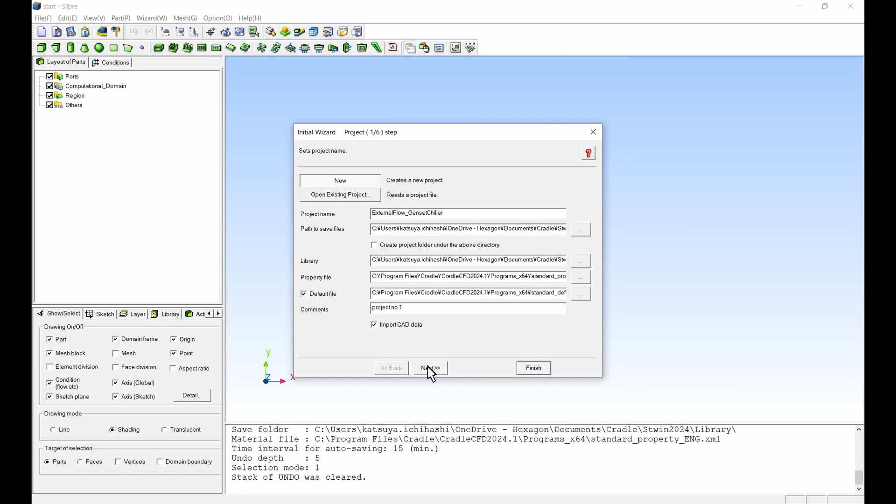On this screen, select Read from File to select the CAD from the Explorer and import it into your model. The next step would be to introduce the X, Y, and Z coordinates to place it, and finally the conversion to scale it. When you are happy with the configuration, click Configure.

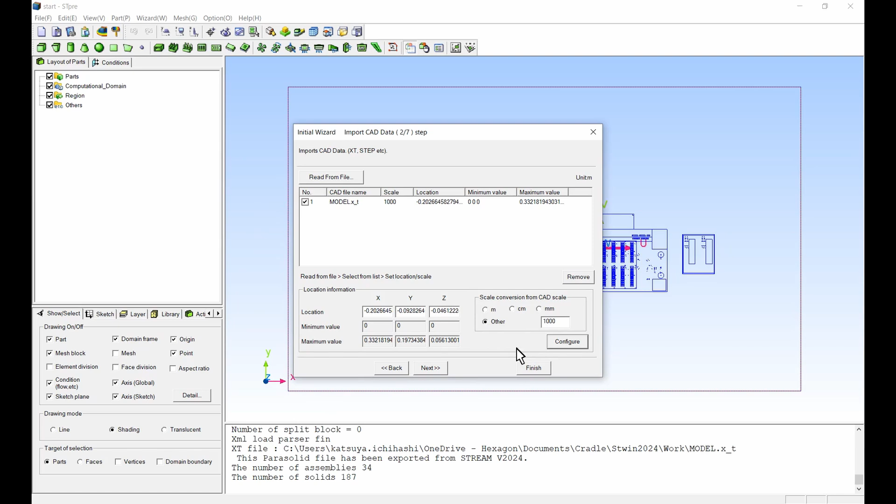On this screen, you can set the coordinate system, the units, and the computational domain. Be aware that if the computational domain is larger than 500 meters, it might not be possible to create it. So set the units to kilometers. When you finish this configuration, click Next to go to the next page.

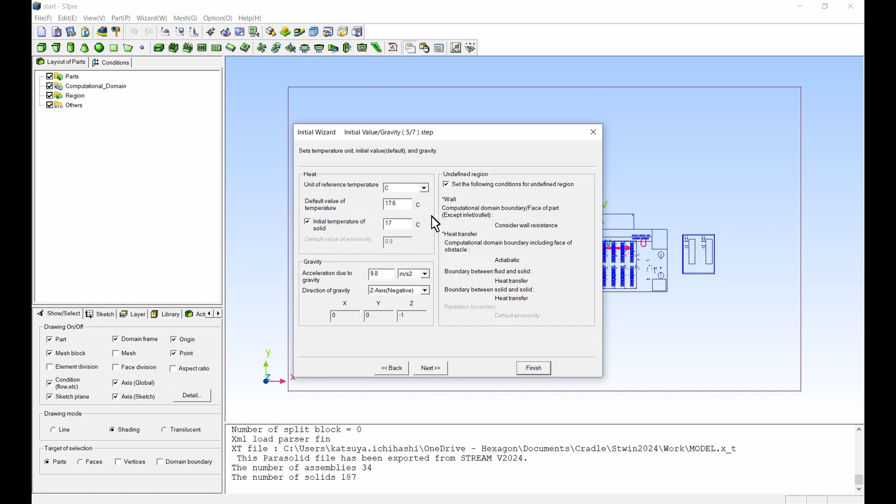No changes are required for the analysis type, so click Next again. Enter the default value of the temperature and initial temperature of solids.

Next, select the basic type of computational domain as external flow, winds blowing through buildings. And in the next screen, enter the wind direction, environment, reference height, ground elevation, and wind speed at reference height.

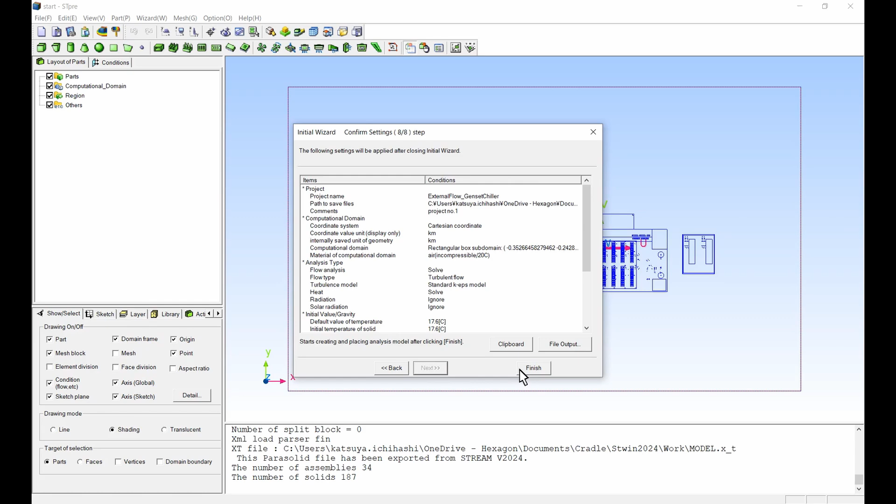When you finish the configuration, click Next and just check that there are no problems in the settings. Click Finish to close the initial wizard.

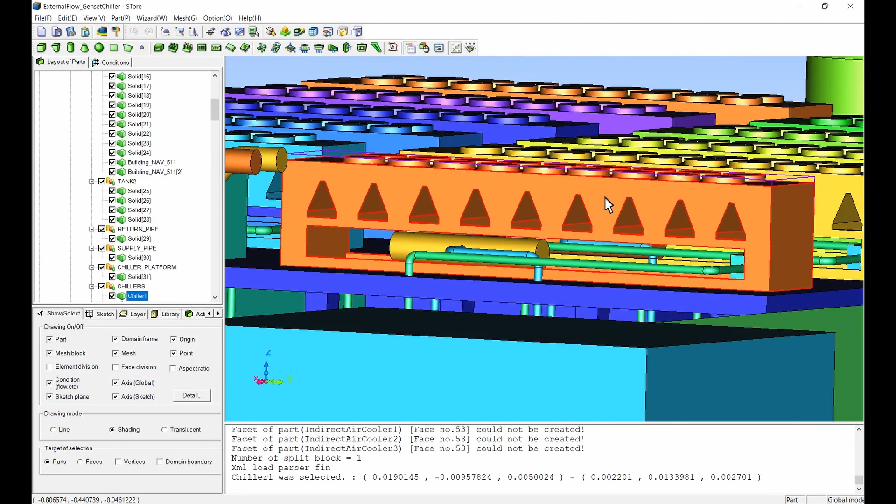Now that we are in the model, the first thing that we are going to do is to set the faces of the chiller parts for the boundary conditions. So we are going to apply the name for the faces that are going to be relevant to set the analysis. First, focus on the chiller 1 and isolate it in the view.

To make the faces easier to see, change the drawing mode to translucent, and then click on Edit Part Face. In this window, enter the part face name and select the part face on the draw window. When you finish selecting all the relevant part faces, click on Register.

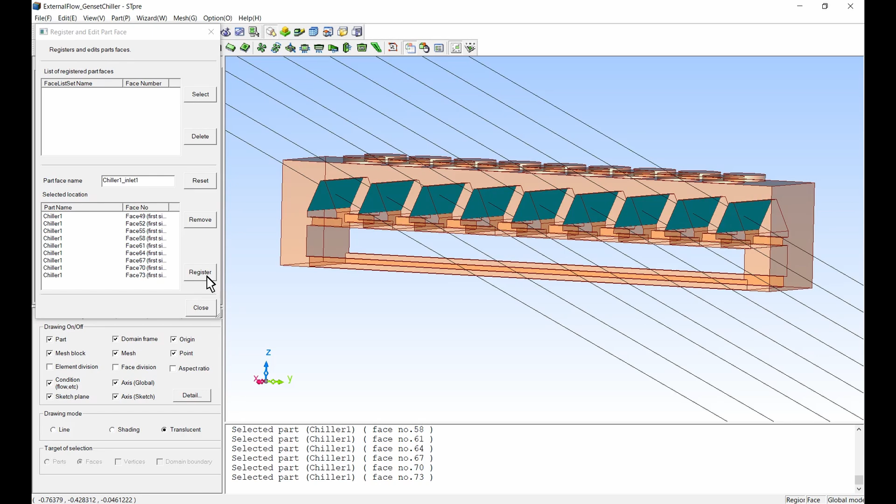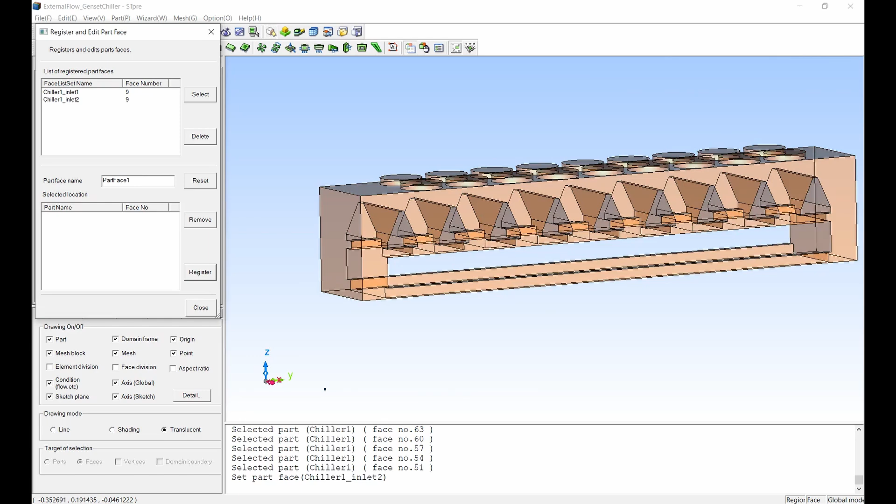We need to follow the same procedure for the part face names for the Chiller 1 Inlet 2 and Chiller 1 Outlet. So select the relevant faces, in this case for the Inlet 2, and register. And finally, repeat the process for the Chiller 1 Outlet to finish this part of the configuration.

We would repeat this process to register the same faces for the other chiller parts.

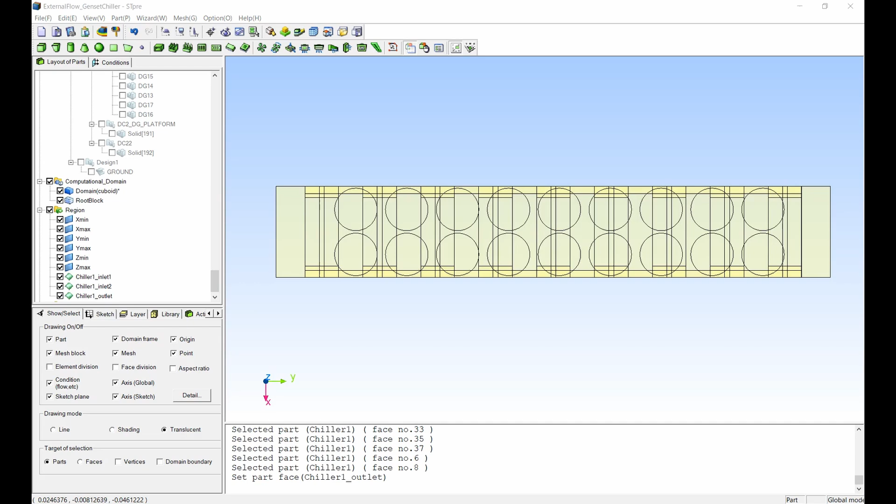Next, we're going to set the faces for the chiller parts for the boundary conditions. First, we need to change the attribute for the Chiller1 Inlet 1 to Condition Region Face.

Then, in Edit Part Face, we're going to enter the part face name Chiller1 Outlet and select the part face on the draw window. We need to repeat this process for the other chiller parts.

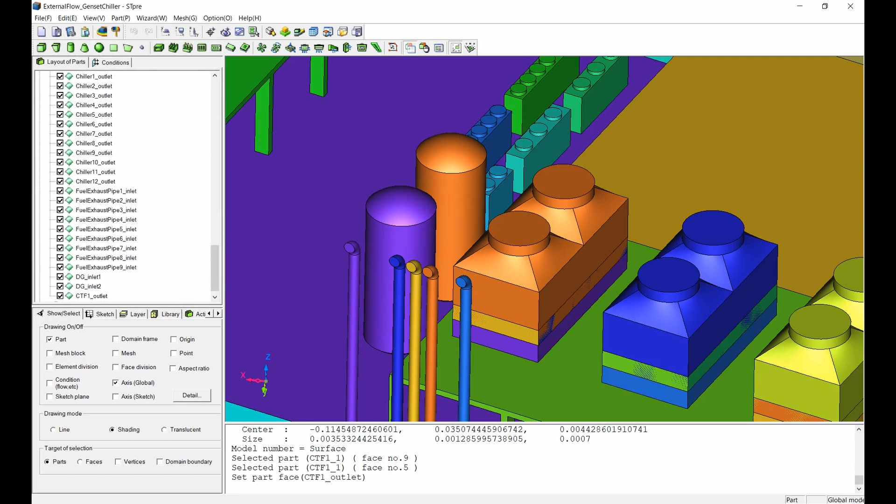Now we are going to set the faces of the IAC parts for the boundary conditions. We can select multiple parts, right-click, and click on Change Part Setting Together. In the attribute part, we can change to Condition Region Face as the attribute and click Set. Repeat this process for the other IAC parts.

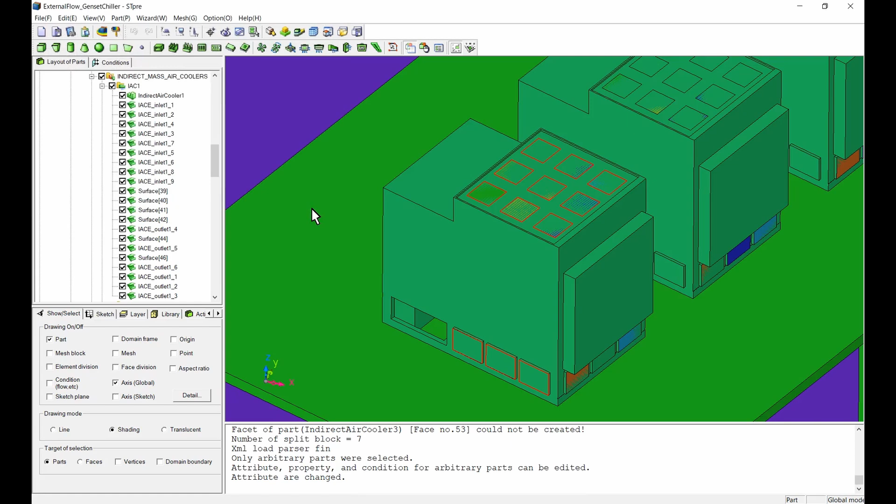Now set the faces for the DG parts for the boundary conditions. First, focus on the DG1, click Edit Part Face, edit the part face name, and then select the part face on the draw window. Finally, click on Register.

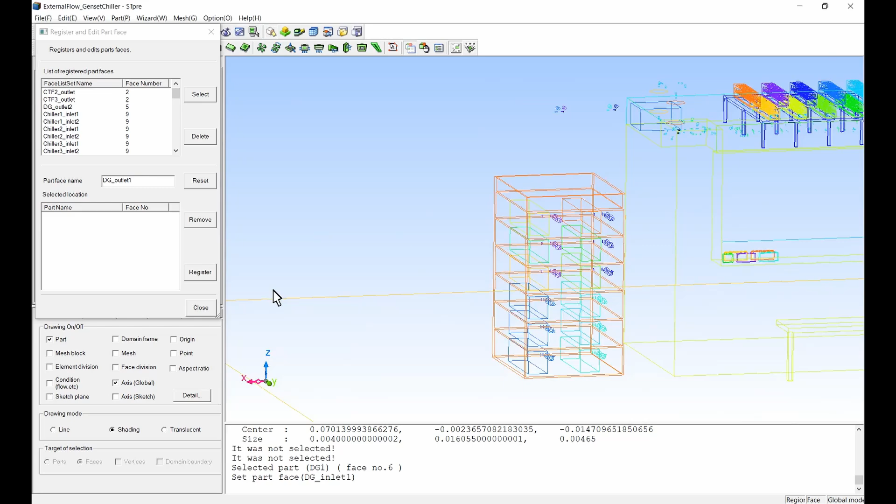We need to follow this same procedure for the rest of the part face names: DG Inlet 1, DG Outlet 1, and Fuel Exhaust Pipe 1 to 4.

In this movie, only one face of the DG Inlet 1 and one face of the DG Outlet 1 are registered, but in actual work, please register all the applicable faces.

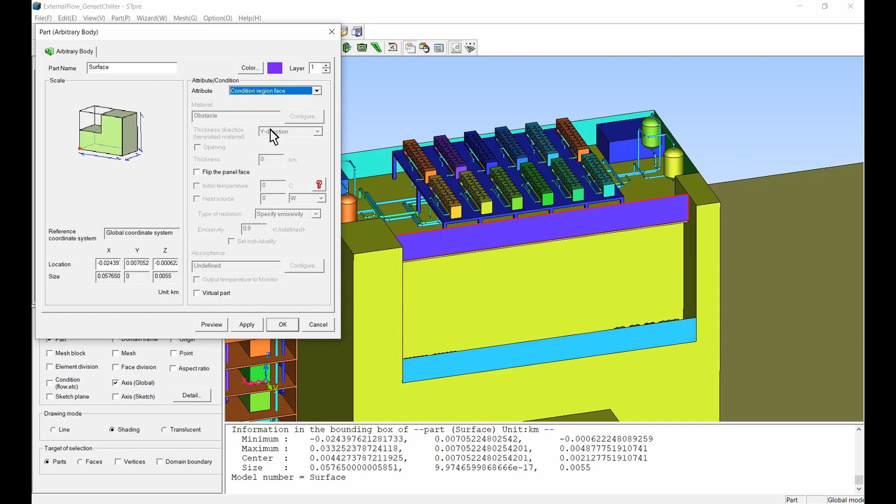Change the attribute of the surfaces of the louvers for the area pressure loss condition. Repeat this process for the rest of the surfaces.

Opening the condition wizard, in the first option of the tree, set the analysis types. Check humidity and air conditioner unit.

Set up the steady state analysis and enter the last cycle number.

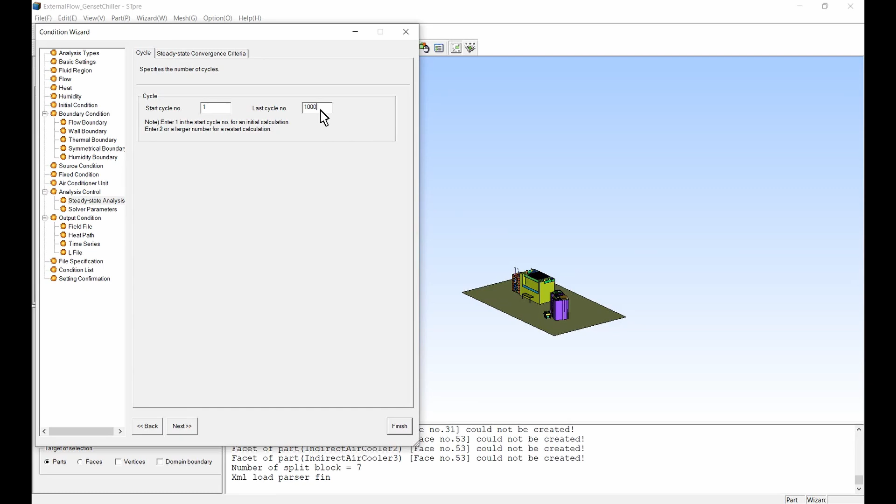Set the parameters for the humidity analysis. Select relative humidity as the unit of humidity input and check both items: consider evaporation and consider latent heat of dew condensation and evaporation. In the vapor pressure tab, check set parameters of vapor pressure and uncheck terminate the analysis.

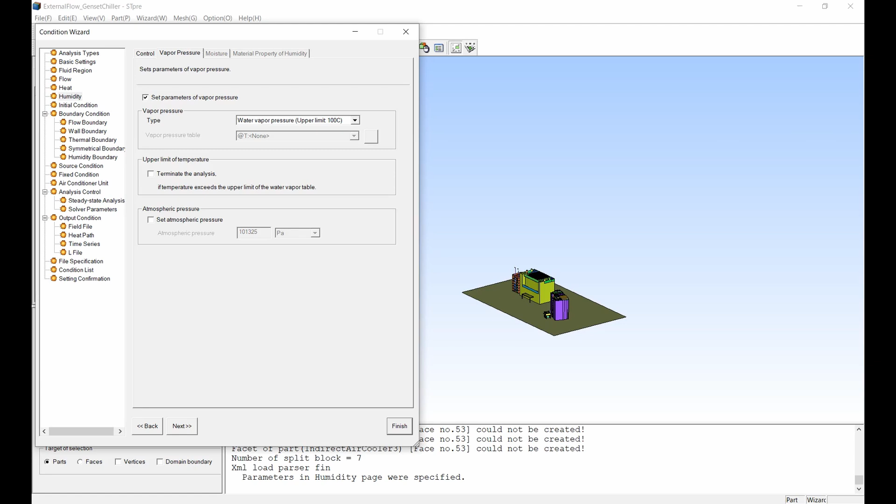Set now the initial humidity value. Select the domain cuboid and then click Initial Value. Select Humidity and the variable name and enter the initial humidity value.

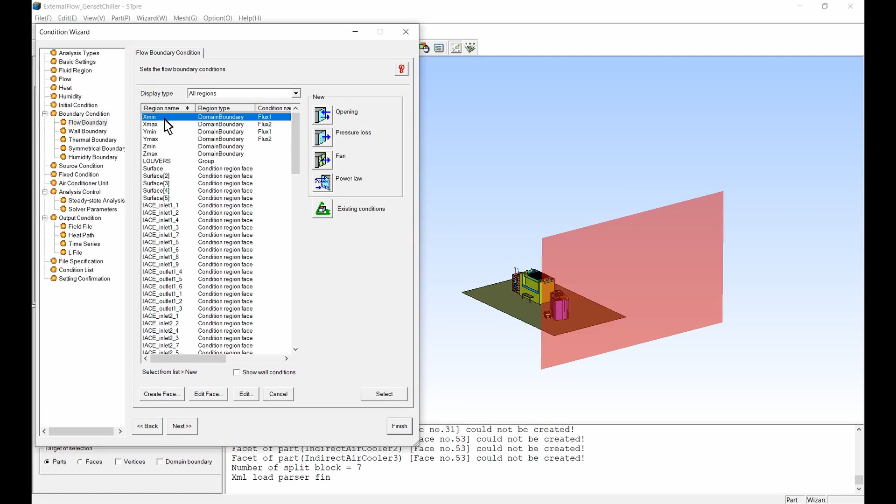Now we're going to set the flow boundary conditions. Double-click on X-min and add the humidity setting to the power law velocity boundary condition. In the Diffusion tab, you can enter the inflow humidity.

Next, set the flow boundary conditions for the part faces and the condition region faces. Select the inlets from 1.1 to 1.9 and click Opening. In the screen of the condition opening, enter the condition name and select Fixed Flow Rate. Check Normal to the face and enter the flow rate.

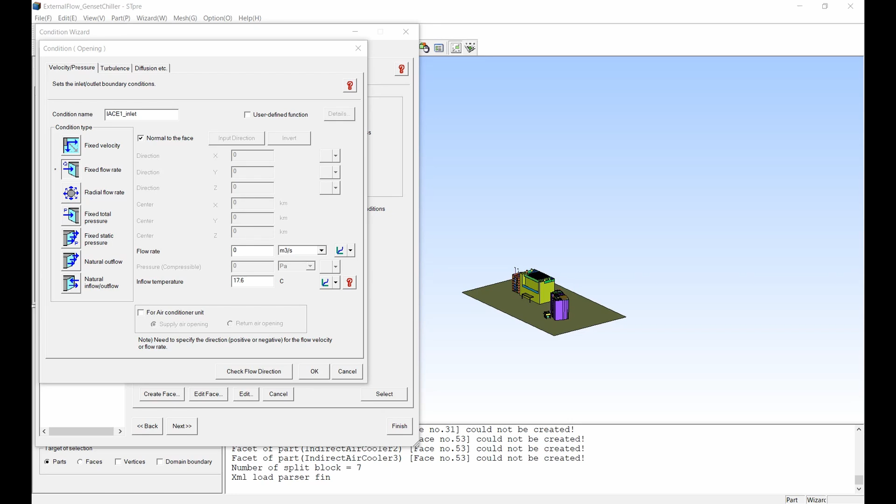Check For Air Conditioner Unit and select Supply Air Opening or Return Air Opening depending on the condition and click OK.

Then select the region names IACE Outlet 1.1 to IACE Outlet 1.6 and click Opening. We will follow the same procedure to set the conditions on these surfaces. We need to follow the same procedure for the other IAC parts.

Next, set the conditions for the CTF1 part. We will follow the same procedure as before, and you need to repeat this for the other chiller parts.

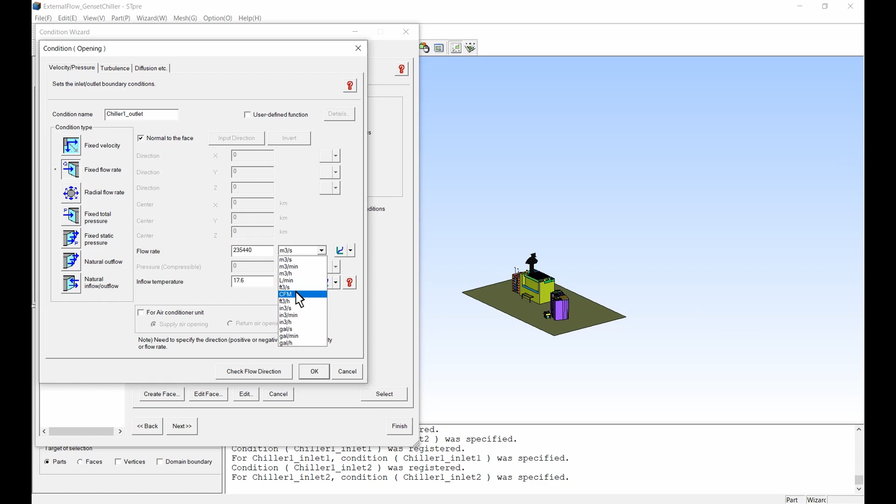We select the region name Fuel Exhaust Pipe 1 and click on Opening. In the condition opening screen, enter the condition name and select Fixed Flow Rate. Check Normal to the face and enter the flow rate and inflow temperature. We follow the same procedure for the other fuel exhaust pipe parts.

Lastly, set the inflow conditions for the DG part, following the same procedure used for the outflow conditions of the DGs.

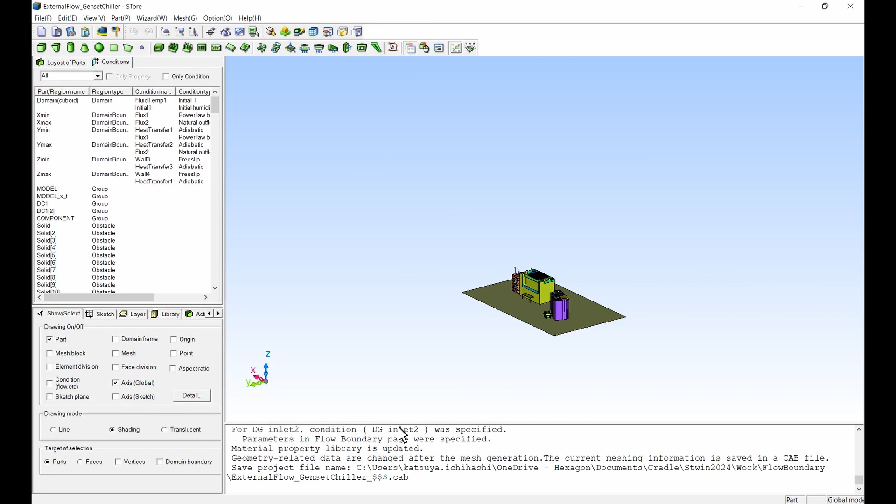Set the area pressure loss for the Surface and Surface 2 to 5 parts. Select Surface and Surface 2 to 5, then click Area Pressure Loss. Enter the opening ratio and click Compute and OK.

Now create the air conditioner models. First, create the air conditioner model CTF. Specify the supply air temperature and humidity using the capability. Set the type of operation and enter the capability. Check Set 100% relative humidity as upper limit if necessary.

Next, create the air conditioner model chiller, following the same procedure. Next, create the air conditioner model DGH1, following the same procedure as before. Same process for the air conditioner model DGH2. Lastly, create the air conditioner model IACE, following the same procedure.

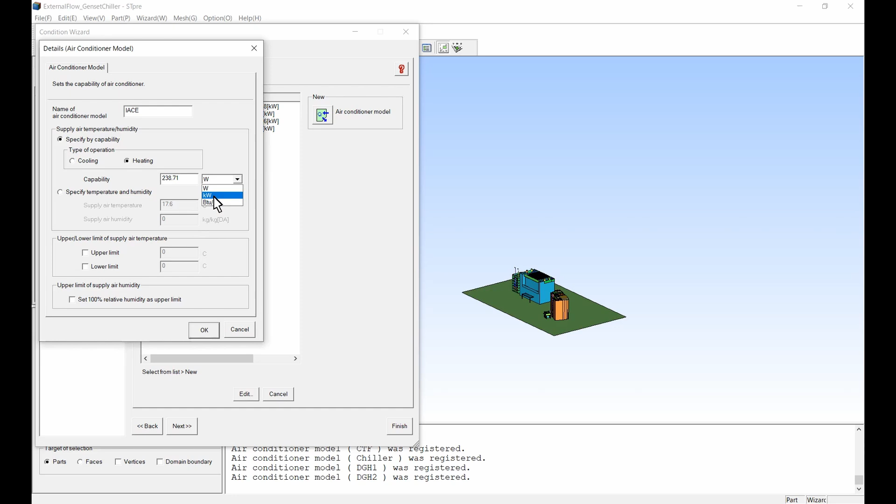Next, set the conditions for the air conditioner models. First, select the chiller regions, click on Air Conditioner, enter the condition name, select the Air Conditioner Model, then click OK. Follow the same procedure for the rest of the chiller regions.

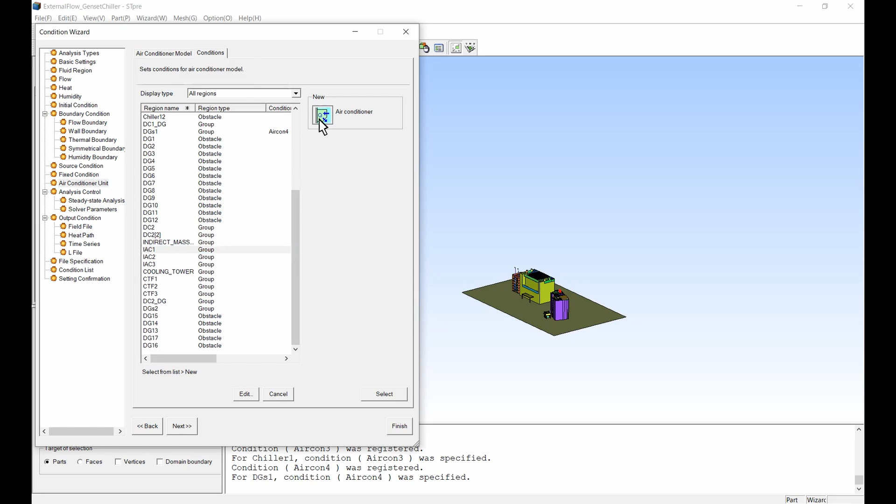Then select the condition for the DGs1 and set the condition following the same procedure. Follow the same for the rest of the DG regions. In the same way, select the IAC regions and follow the same procedure, and lastly do the same for the CTF regions.

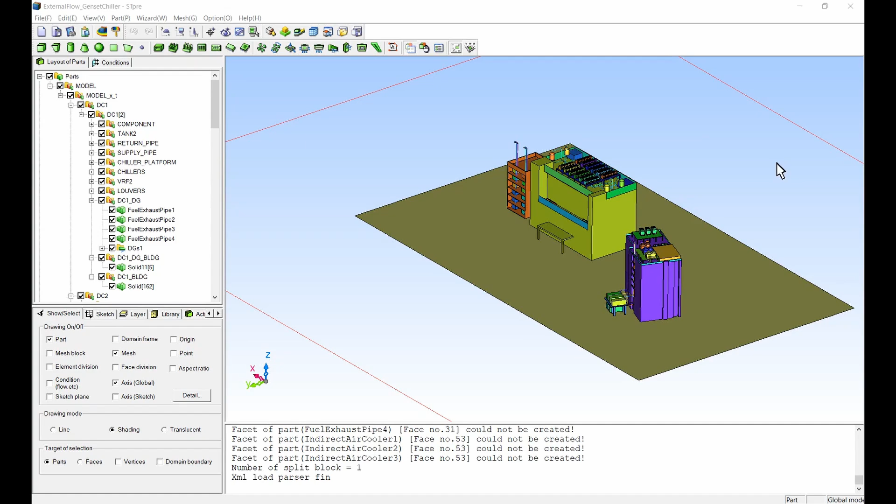We are now going to create the mesh using multi-blocks. Click the Mesh button, and in the Basic Settings tab, enter the division parameters of the root block.

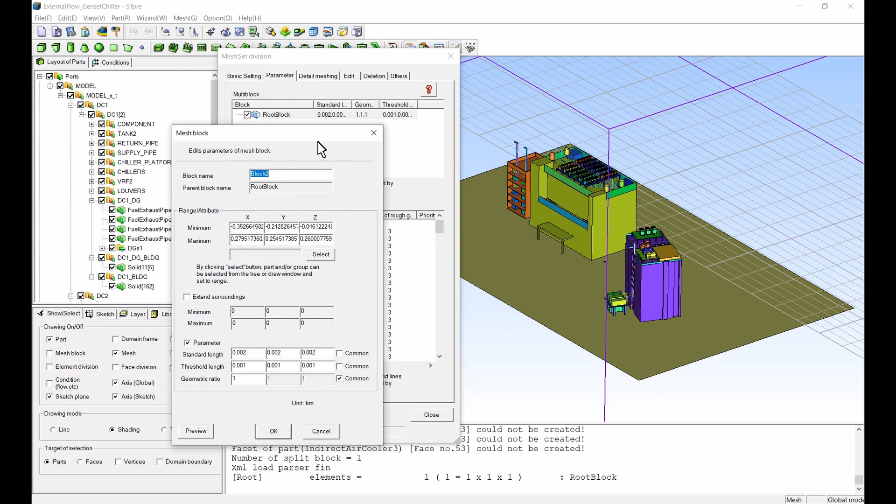Go to the Parameter tab, right-click on Root Block, and select Create Block to create a child block. In this screen, you can use the Select button to select a part or a group in the Tree or the Draw window as a reference. By checking Extend Surroundings, the range of the child block can be expanded. Set the minimum and maximum values for the x, y, and z coordinates.

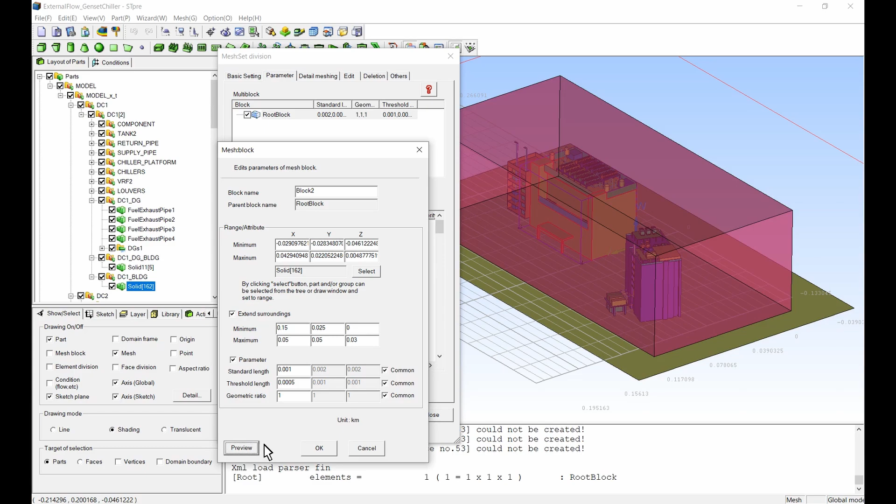Once you finish this setting, enter the mesh parameters of the child block and click OK. Use the same procedure to create all the child blocks you need for your mesh.

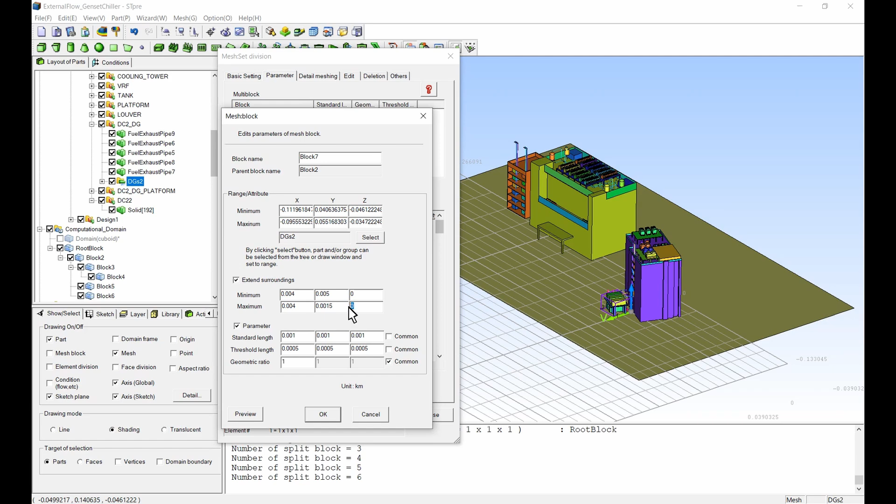Lastly, click Gridding to generate the mesh grids, and afterwards Meshing to generate the mesh elements. Click Close to close the meshing screen.

We are now ready to export the S file and save the cap file. Click the Export button, specify the path and file names in the Explorer, and export the S file. Then click the Save button to save the cap file.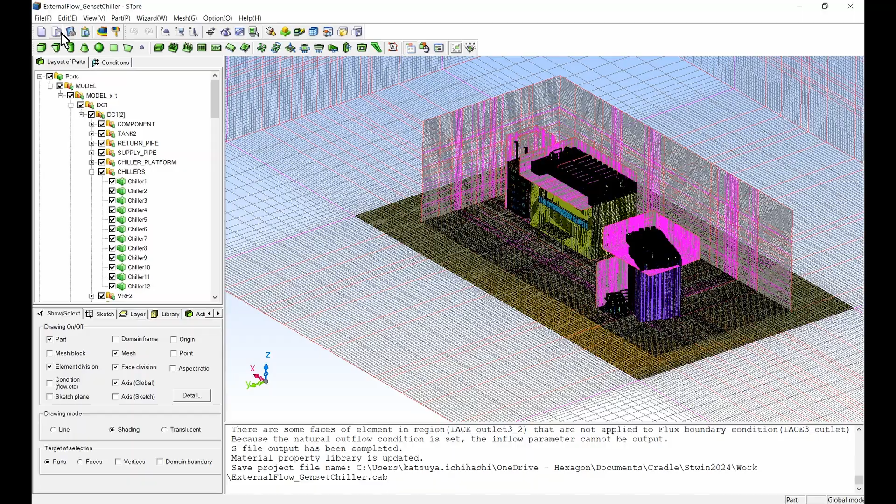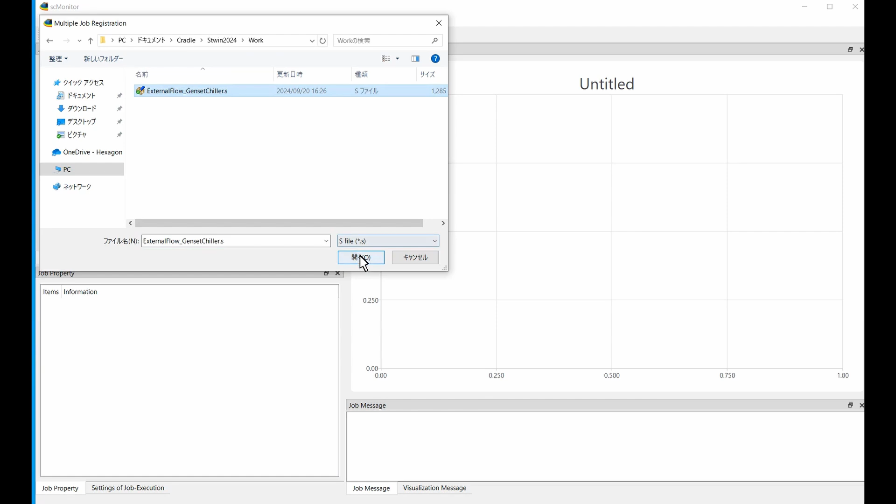We can now execute the analysis calculation on the scSTREAM Solver. First, launch the scSTREAM Solver by clicking its icon in the Kicker. Then click Open and select the S file in the Explorer, and finally click Execute. A confirmation screen appears to start the calculation. Click Yes and the calculation starts.

Now we can visualize the analysis results using the postprocessor. Click the scSTREAM postprocessor icon from the Kicker, click the Open Files icon from the toolbar, then select the FLD file in the Explorer and click Open.

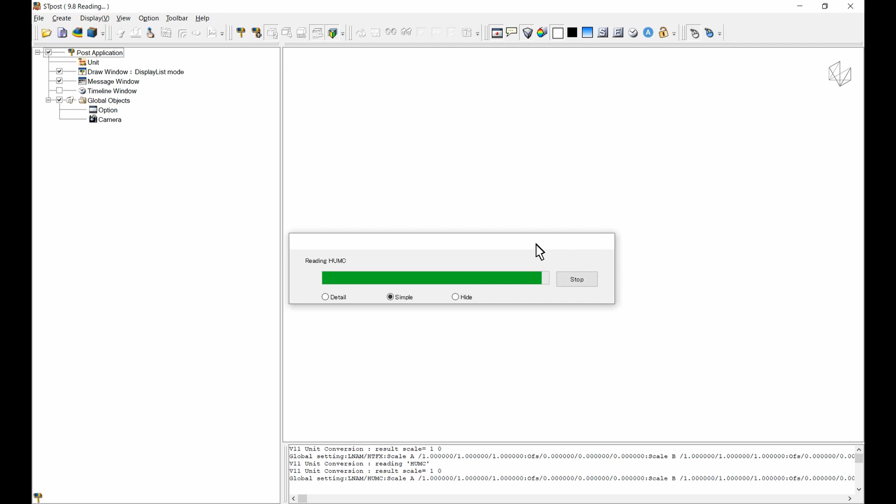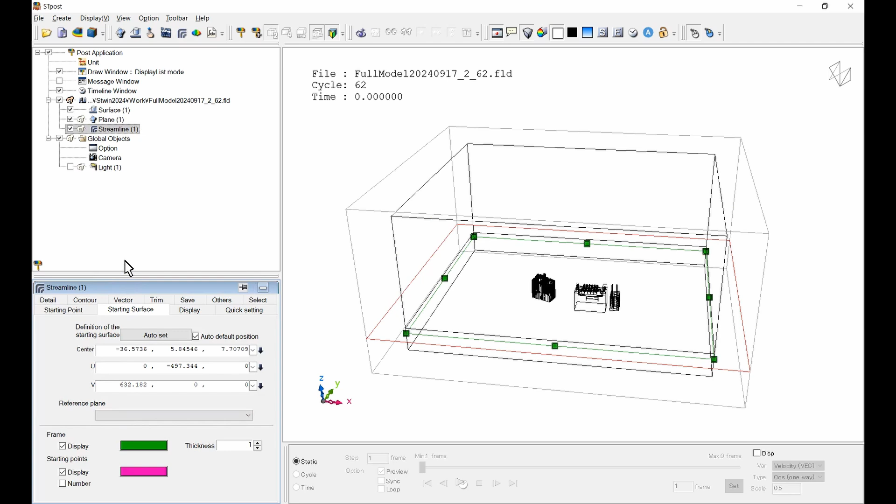We are going to create a streamline object from the chiller parts. But before that, we need to adjust the already created Plane 1 object, entering the coordinates of the surface where the streamlines will originate. Then click the Create New Streamline icon to create a new streamline object. In the Starting Surface tab, select Plane 1 as the reference plane. Then, in the Streamline 1 object, click the icon between the object and the checkbox, and adjust the starting plane with the mouse.

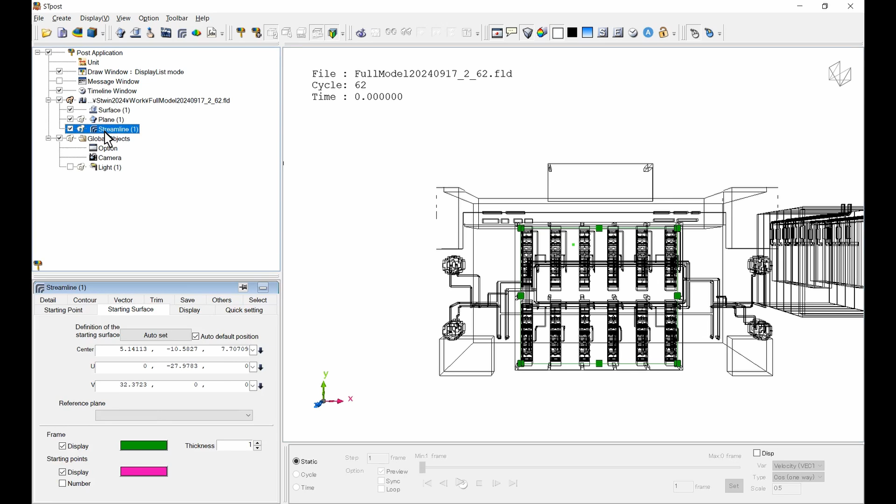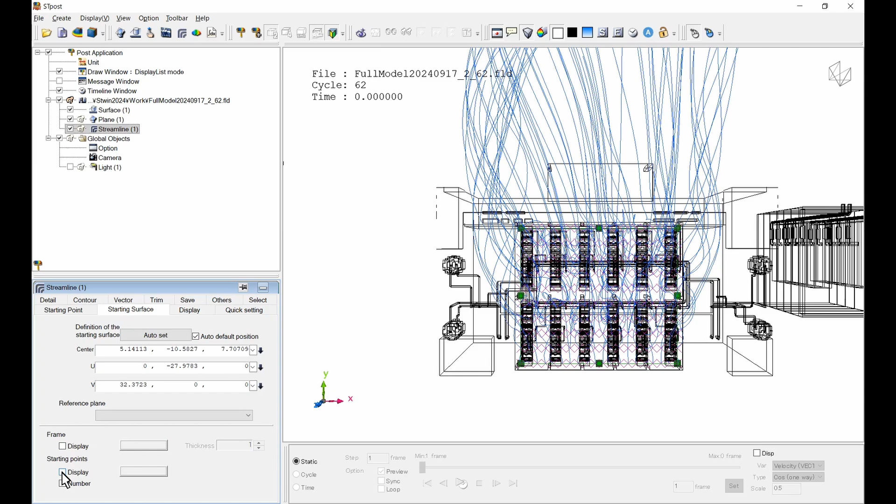In the Starting Point tab, enter the starting points of the streamline. Select the square as the starting point and enter the number of horizontal and vertical points, and uncheck Create Only on Perimeter to make the inside of the square the starting points as well. In the Display tab, select the type and the number of calculations of the streamline. Finally, in the Starting Surface tab, uncheck the Display items in Frame and the Starting Points.

We are going to create a volume renderer object of the temperature. Click Create, Volume Renderer, and in the Scalar tab, check Display and select the variable. Optionally, you can add control points to set the opacity, and optionally change the opacity scale in the Details tab.

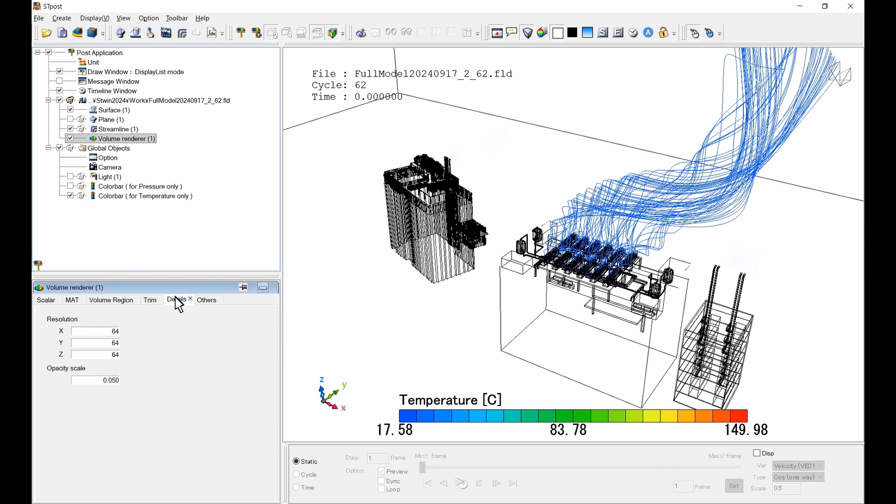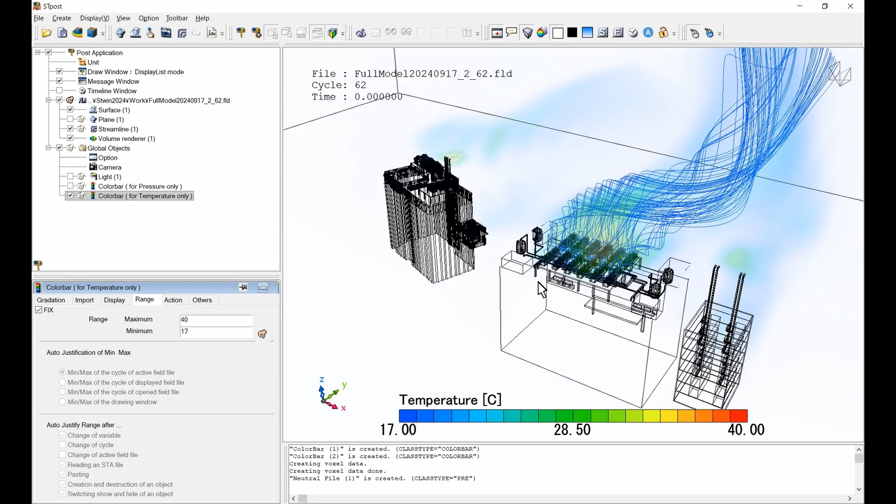In the color bar for the temperature-only object, change the temperature range. Finally, to create a neutral file object, click Open File and select the neutral file in the Explorer, then click Open. In the Display tab, uncheck any parts you don't want to display, such as boundary surfaces, and change the color of the parts if necessary.

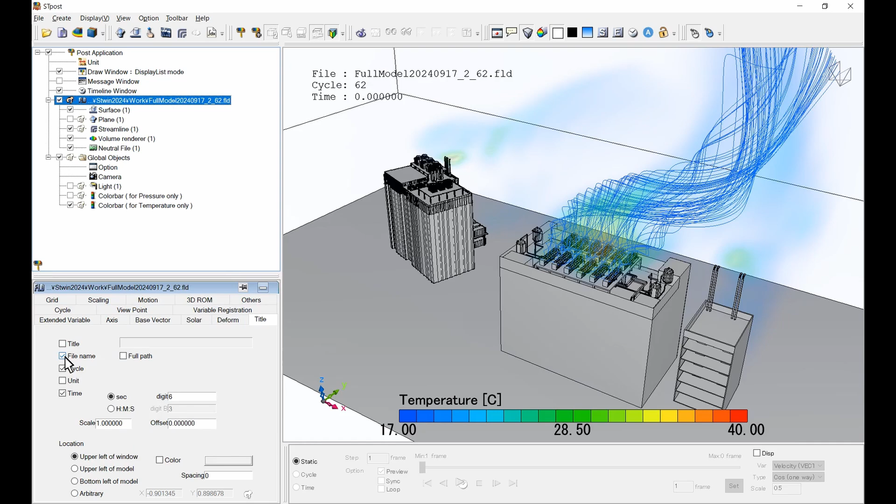Lastly, if necessary, hide the title of the draw window in the Title tab of the FLD object.